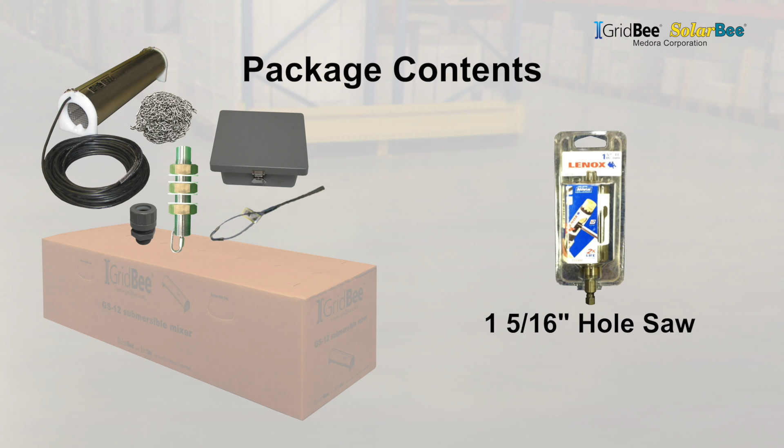A through tank fitting is included and also serves as the electrical cord pass-through, electrical cord strain relief, and/or a retrieval chain attachment point. An electrical junction box is provided and can be mounted on the outside portion of the through tank fitting. Other contents include a nylon cord seal fixture, Kellems grip cord strain relief, a 1 5/16 inch hole saw, a tube of Lexel sealant, and chain grab tools.

A GS Series control panel is also available as an optional accessory. Other components may be included due to specific design criteria for the project.

The tool requirements for a GS mixer installation are as follows: cordless drill, large channel lock pliers, large crescent wrench, a catch bucket, box, or the like, a 1 5/16 inch metal hole saw, high quality sealant, and chain grab tools. The hole saw, sealant, and chain grab tools are included in the package contents.

You may also want to have some food grade vegetable or seed oil on hand. This will be discussed later during the installation portion of this training.

Though most tanks have an adequate hatch or vent for installation of a GS Series mixer, it is important to note a minimum 12-inch diameter, free and clear opening is needed. Often, a ladder or other internal structure will impede the opening and should be accounted for.

The electrical requirements for this training are split into two sections. The final connection at the topside junction box to the GS mixer in the tank will be covered in more detail in the installation section.

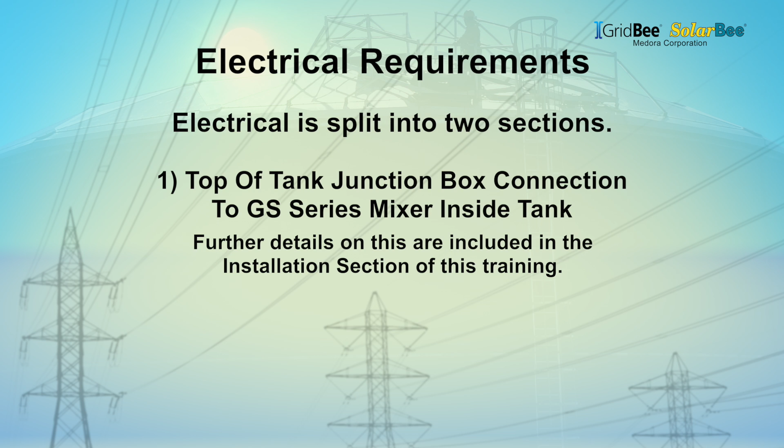Generally, the electrical is run from the power source to the top of tank before the installation of the GS mixer. Other than the optional control panel, Medora Corporation does not furnish any other material to provide power to the top of tank. Please use qualified personnel to properly install any and all electrical components.

Standard GS Series electric mixers require 120 volt AC on a dedicated 20 amp circuit. We also recommend you include GFCI, fuse protection, and a means of quick power disconnect.

Power conductors used must be sized so voltage drops no more than 10 volts AC between the power source, control panel, and top of tank junction box while operating 120 volts AC at 11 amps.

If power is installed prior to the installation of the GS mixer, be sure to leave enough excess power cord to reach the through tank fitting and top of tank junction box. Safely secure the excess to the tank until it is time for the mixer installation.

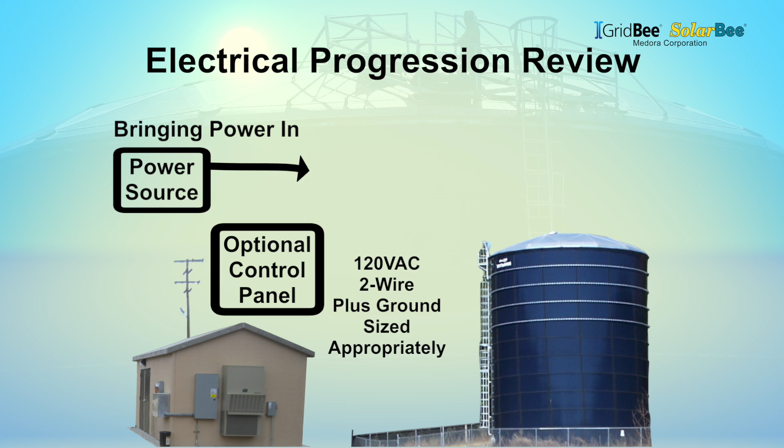This simple diagram shows the basic electrical installation progression. From the power source, appropriately sized 2-conductor plus ground wire is installed to the top of tank. A control panel between the power source and top of tank junction box is highly recommended.

When the GS mixer is installed, its power cord will pass through into the through tank fitting and will connect to the power source in the top of tank junction box.

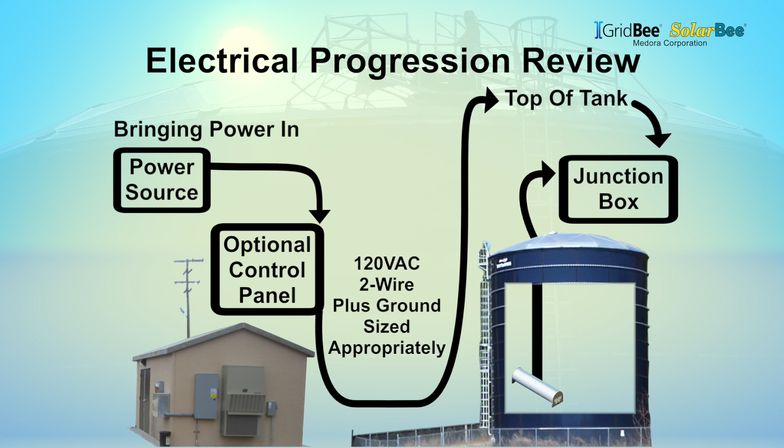When preparing for the installation, take time to develop a lift plan for people, tools, and equipment. Equipment such as harnesses, ropes, pulleys, slings, bags, winches, telehandlers, and cranes can be very helpful to ensure a safe installation. Every tank is different and a specific lift plan should be developed for every installation.

Lastly, use best practices and consult with the tank operators to develop an agreeable decontamination plan.

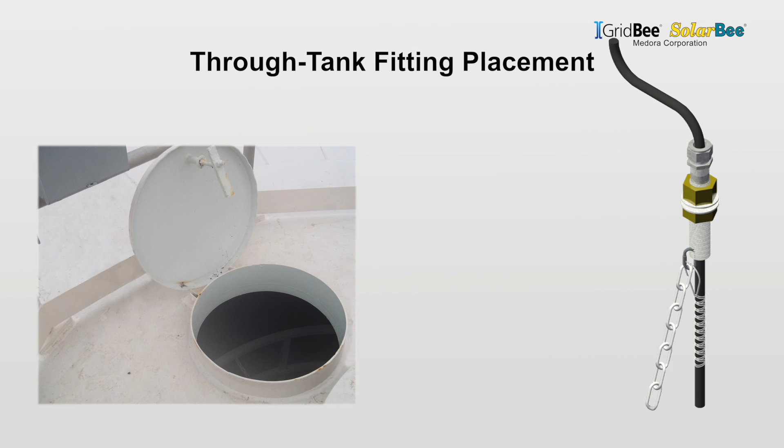Ideal placement of the through tank fitting in relation to the installation opening is very important. It serves numerous functions including electrical cord pass-through and seal, as well as the retrieval chain, cord strain relief, and junction box attachment point. First off, identify the hatch or opening where the GS series mixer is to be installed.

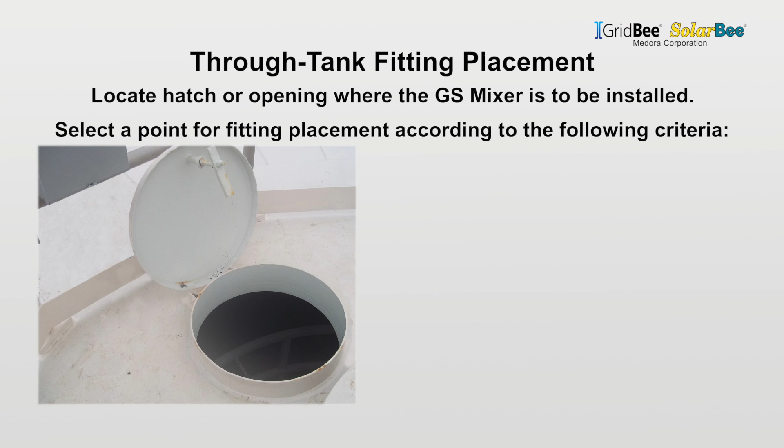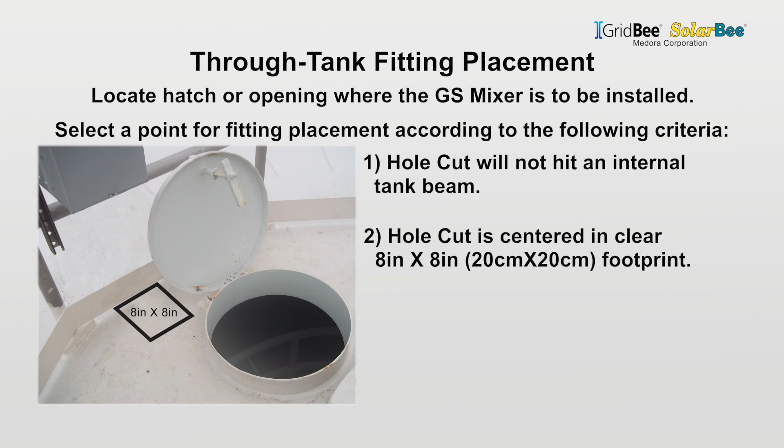Then use the following 3 criteria to determine the proper location for the through tank fitting: 1. The hole cut will not hit an internal beam. 2. The hole cut is centered in a free and clear 8-inch by 8-inch footprint. And 3. The hole cut is within arm's reach of the hatch or opening.

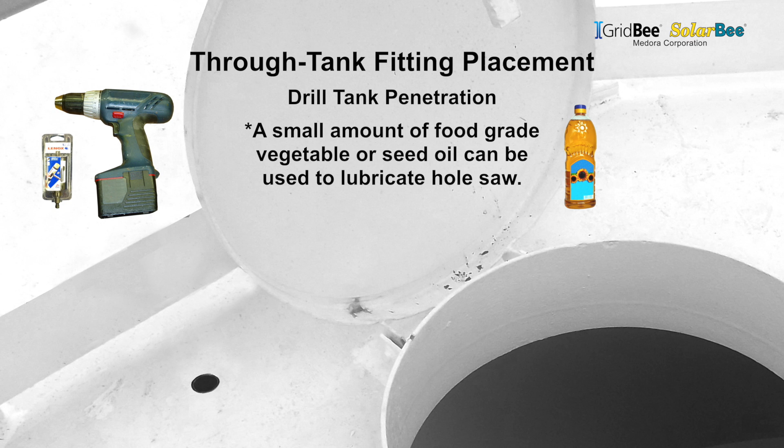Mark the center point, then use a cordless drill with the 1 5/16 inch hole saw to perform the hole cut. A small amount of food-grade vegetable oil works well for lubrication of the hole saw. Just before the hole cut breaks through, position the catch bucket or other appropriate container below the hole cut to keep drilling debris from falling into the tank.

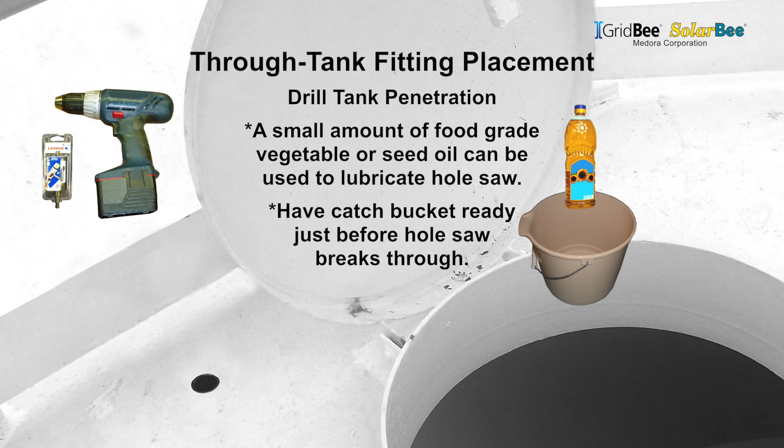Once the hole cut is complete, thoroughly clean all surfaces of any filings before removing the catch bucket and prepare the area for installation of the through tank fitting. Apply a healthy amount of sealant on the interior, exterior, and inner wall surfaces of the hole cut. This will prevent corrosion around the fixture.

A standard through tank fitting consists of 1 stainless steel cord bolt with a stainless steel quick link attached to one end, 3 brass nuts, and 4 HDPE washer seals. Install 1 nut and washer on the in-tank end of the cord bolt. You may also want to add more sealant to the wall side of the washer.

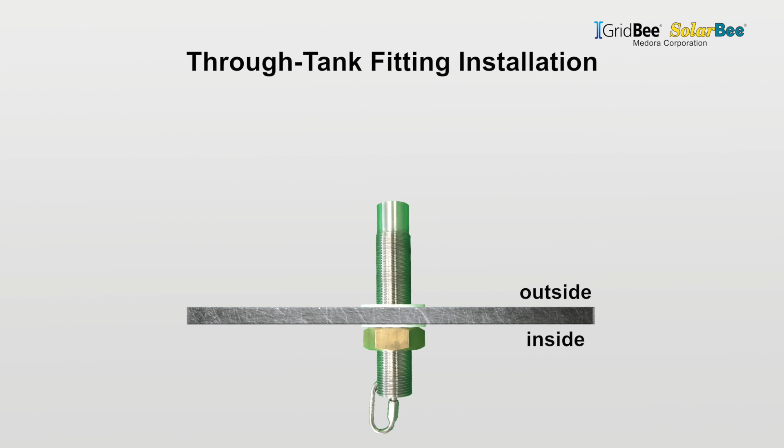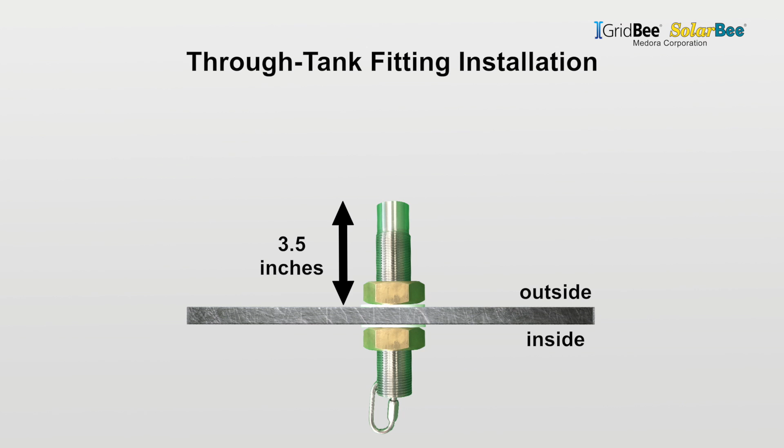Push the fixture through the hole cut from inside the tank. Add a washer then brass nut on the outside portion of the fixture. Again, you may want to add more sealant to the wall side of the washer. Adjust the fixture so the top of the fitting extends 3.5 inches from the outside of the hole cut. Then tighten the top side brass nut with a wrench or pliers to secure the fixture.

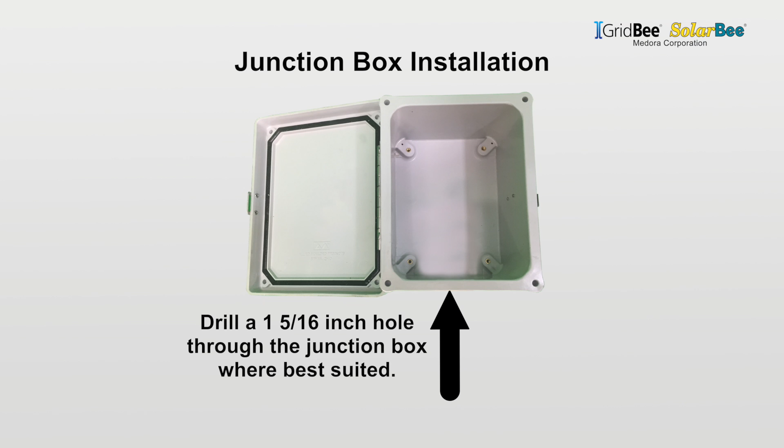To mount the junction box to the through tank fitting, drill a 1 5/16 inch hole in the junction box where best suited, usually the bottom end. You may consider making this hole cut on the ground to keep fiberglass cuttings away from the tank opening. Apply sealant to the interior, exterior, and inner wall surfaces of the junction box hole cut. Add a washer, place the junction box, add another washer, then fasten the nut from inside the junction box until everything is secure. Double check your work to ensure the through tank fitting and junction box are secured and sealed.

Please note there are 2 sections of chain for mixer deployment. The first section is attached to the mixer at the factory with a pre-placed quick link calibrated for deployment. The second section is the standard 75-foot retrieval chain. Connect one end of the 75-foot retrieval chain to the quick link on the factory attached mixer chain. Be sure to tighten the quick link using pliers.

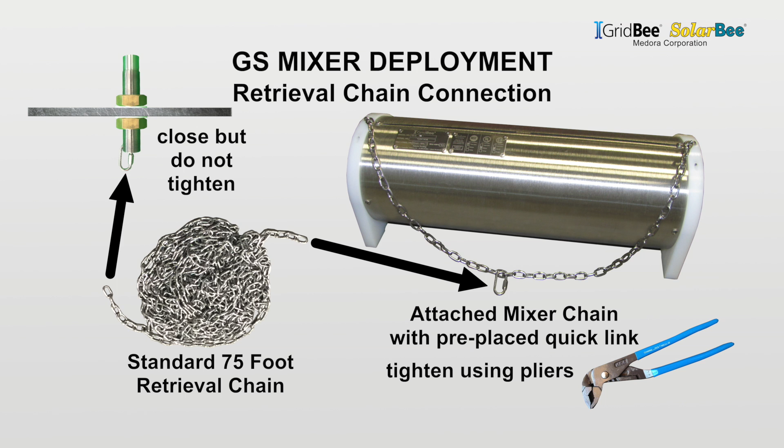Connect the opposite end of the retrieval chain to the quick link of the through tank fitting. Close but do not tighten this quick link yet, as it also is the attachment point for the cord strain relief. It is now time to lower the mixer into the tank.

An extra set of hands can be useful during this part of the installation to feed electric cable and retrieval chain, as well as back up the physical lowering of the mixer in case the first person becomes fatigued. Be sure the electrical cord and retrieval chain are laid out properly to avoid any tangling while the mixer is being lowered. Also be mindful the electrical cord end does not fall completely into the tank.

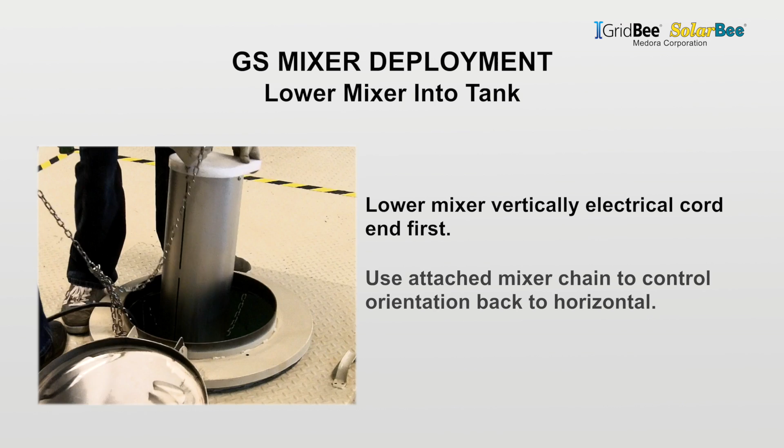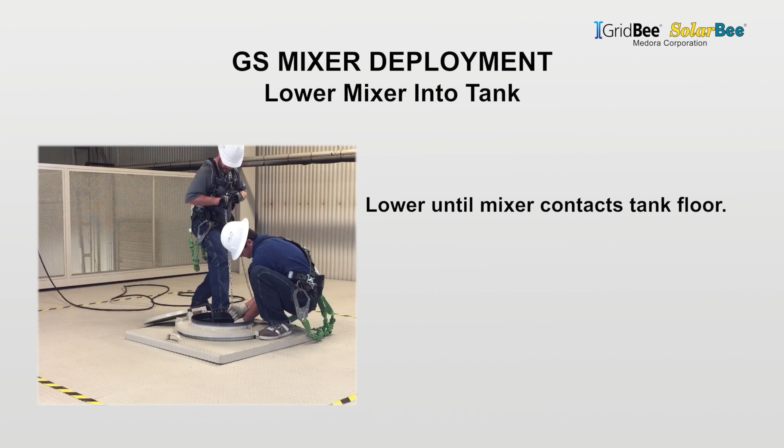Support the weight of the mixer, then guide the electrical connection end vertically through the hatch. Once through the opening, use the attached mixer chain to control the mixer as it orients back to horizontal. Be sure to have a good handle on the retrieval chain as to not drop the mixer. Lower the mixer by the retrieval chain while feeding the electric cord through the hatch until the mixer contacts the tank floor and the retrieval chain becomes slack. Once on the tank floor, make sure the mixer is resting on its flat side with the discharge slots facing upward.

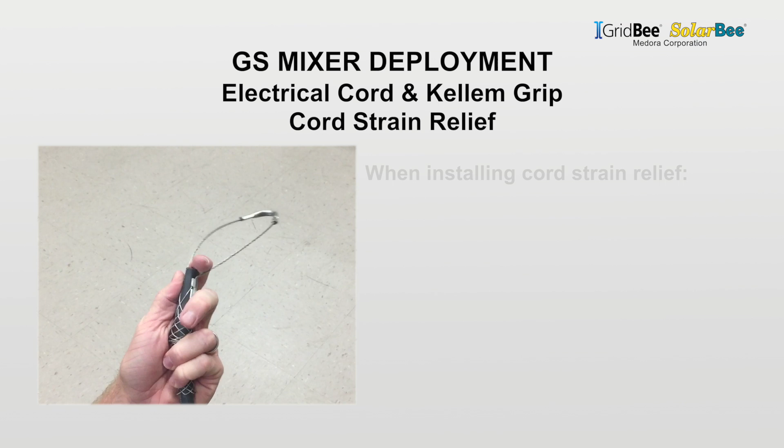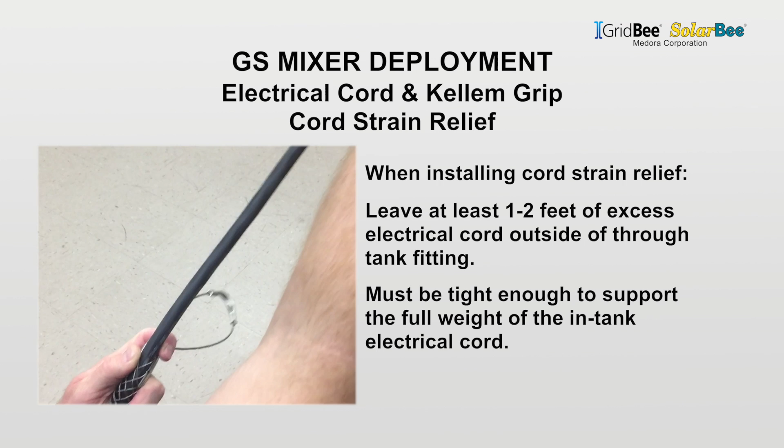Next, the electrical cord must be secured to the through tank fitting. Slide the Kellems grip cord strain relief onto the end of the mixer electrical cord. When placing the Kellems grip, keep 2 things in mind. You will need approximately 1 to 2 feet of free electrical cord on the outside of the through tank fitting. And the Kellems grip must be tight enough to support the full weight of the in-tank electrical cord while leaving the cord entering the through tank fitting free and slack.

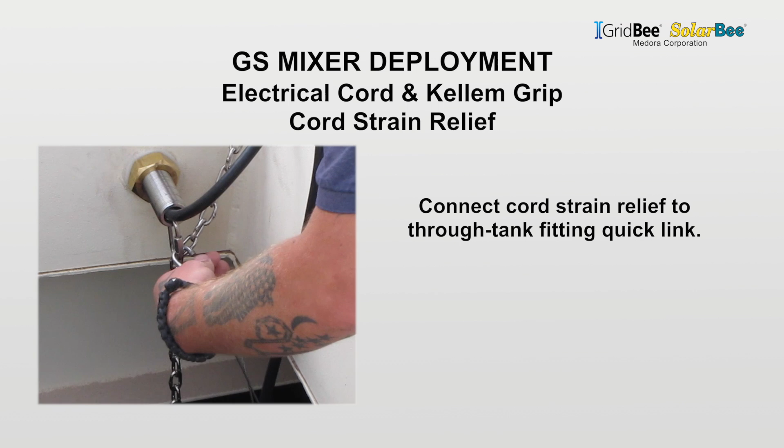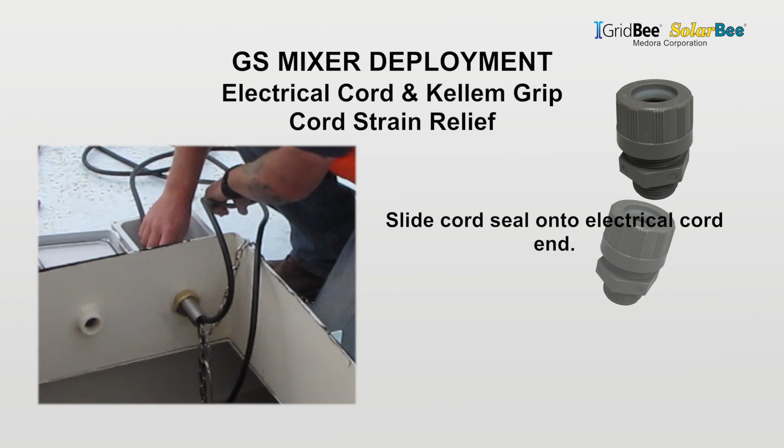Once in place and tight, connect the Kellems grip end to the same quick link as the retrieval chain on the through tank fitting. Now this quick link can be tightened using pliers. Snake the free cord end through the fitting into the junction box. Slide the nylon cord seal over the electrical cord end and thread into the top of the through tank fitting. Tighten to seal around the outside jacket of the electrical cord.

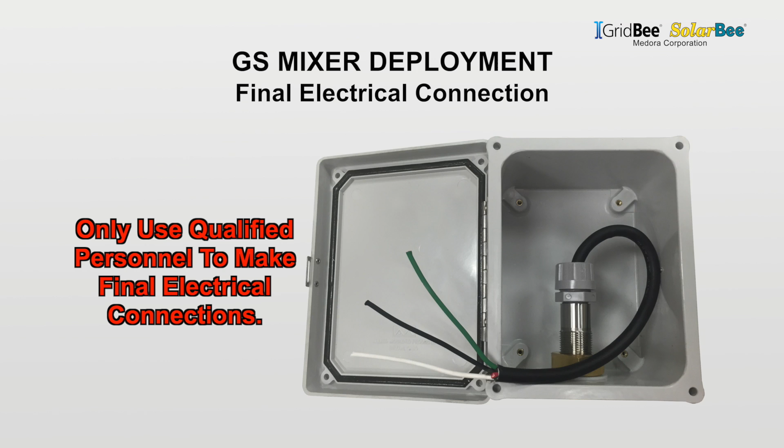The final electrical connection should be performed by qualified personnel to properly integrate the source power with the mounted junction box and the GS electric mixer using the following wire code. The white wire is connected to 120 volt AC neutral. The black wire is connected to 120 volt AC hot, and the green wire is connected to the ground.

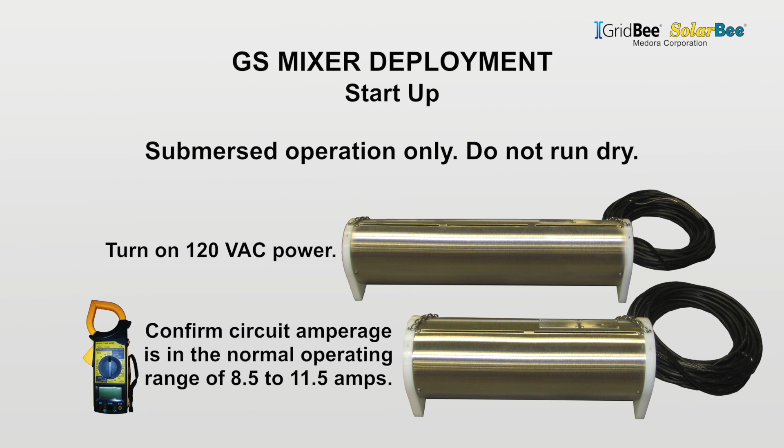GS electric mixers are designed for submersed operation only. To start the mixer, simply apply 120 volt AC power. To confirm proper operation, the current passing through the 120 volt AC circuit should be between 8.5 and 11.5 amps.